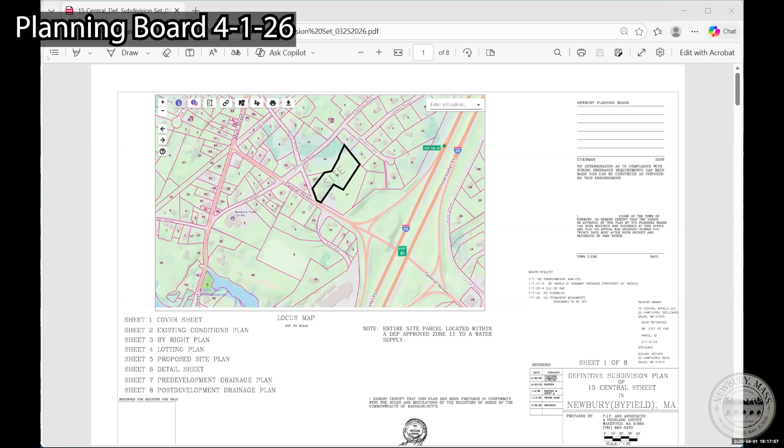Okay, so this is sheet 1 of the subdivision plan, which is basically showing the area around the site. What's in black is the site itself. We did add a notation on here that the property is located in the zone 2 to a water supply. So that's the only change on sheet 1. Sheet 2 is the existing conditions plan. There were no changes to this plan since the original submittal. Sheet 3 is basically showing the by right plan, which is just showing the roadway coming in with a cul-de-sac. Sheet 4 is the proposed subdivision plan. Again, there were no changes to this plan. And sheet 5 is our proposed subdivision site plan. Yep, I can take it from there, Paul, on sheet 5.

Okay. So the big change to sheet 5, our previous design for the roadway, we were utilizing porous pavement. Since the site's within a zone 2 of the water supply, the peer review felt that was not the best choice for stormwater management for this site. In reviewing DEP policy, it can be used, but it's restricted and it was a bit cumbersome. So I redesigned the drainage. I actually think with this design, it's a better design now for stormwater management.

I added a trench drain right at the beginning of our roadway, just off of Church Street. And water will come down that roadway, be connected with a trench drain. It'll convey to a deep sump hooded manhole. And then from there, it will convey out to a rain garden. So it's really a low impact design. The challenge on this site was just getting water from that trench drain to a lower point on the site, but I can do this all by gravity. It's not a pump system. By locating the rain garden where we show on this plan now, it'll all be gravity fed.

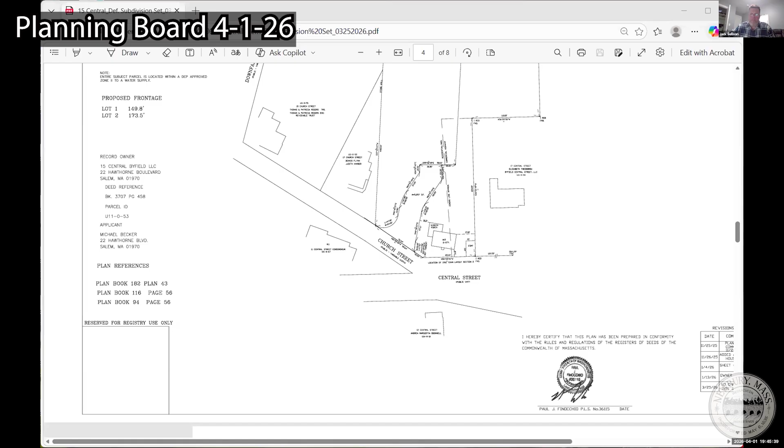I believe he's, do they still have sharing access, Kristen, Sadie? Good, but Jack, if you'd like to share, I can give you that capability. Sadie, if you can enable Paul, he has the plans. Okay, yeah, probably. Thank you. And Mr. Chairman, what was the abutter Mike's address again? 17 Church Street. Yep.

What sheet would we like to see? This is the roadway coming in. So this is number 17, I believe. His house is right here. And the proposed duplex will be back up in this area here. Paul, can you pull the sheet with the topography? Yes. This one here is the existing conditions plan. So there's a large hill here. His house is over in this area right here. And again, the proposed duplex is back in this area right here.

There is a pretty large boulder to the immediate right of his house that would screen the house from the road. Maybe not the duplex, but as you can see, there's pretty significant topography from where we're proposing to put the house down the hill, at what looks like 76 elevation, versus the height of the. If I could just, yeah, I can't really. It's between 76 and 82, 80.

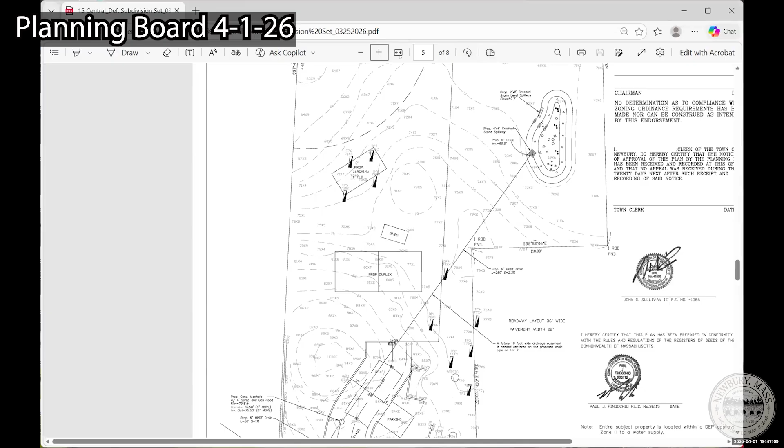Elevation for the proposed duplex, and the ledge is at, it looks like, I don't know, Paul, can you zoom in on that? I'm trying to do that now. Yeah, sorry. The ledge is up around elevation 90. So let's just say an average 90. Yeah, so ballpark 10 feet higher than the ground elevation of the front of the duplex. Correct. And then the ledge outcropping, I've been out there, I'm going to say it's 8 to 10 feet tall on top of that. The big boulder. Yep, I see that. So there'll be some screening provided by that.

We have no intention of removing any trees to the left of that ledge boulder between there and the retaining wall that's shown on the plan. So from the perspective of screening, I don't know exactly where your house is based on this plan, but it seems like there will be a pretty good amount of screening. It's pretty dense foliage that exists now, pine trees and other trees. Paul, do you have the tree plan? Yes, hold on.

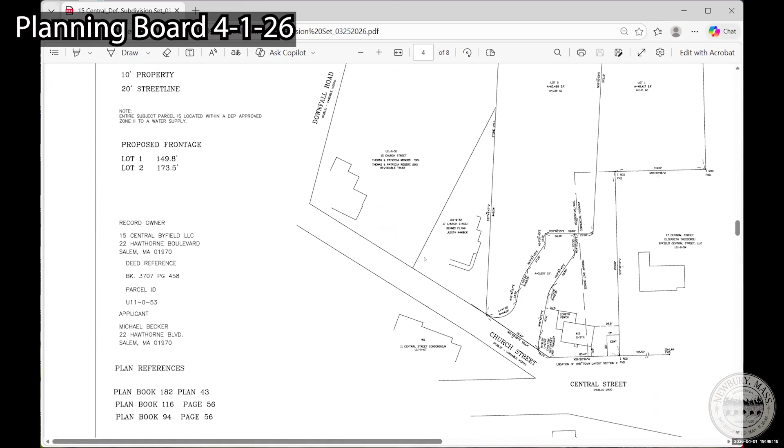So the top of that ledge is basically in line with the back of my house. And from your plans here, where the proposed duplex is going, pretty much when I open up my back door, bam, you'll see this big duplex there. So another question that might help answer would be what exactly is the setback from the property lines to where the start of this duplex is going to be, because I don't know if I missed it in whatever you submitted. We're well outside of the setbacks.

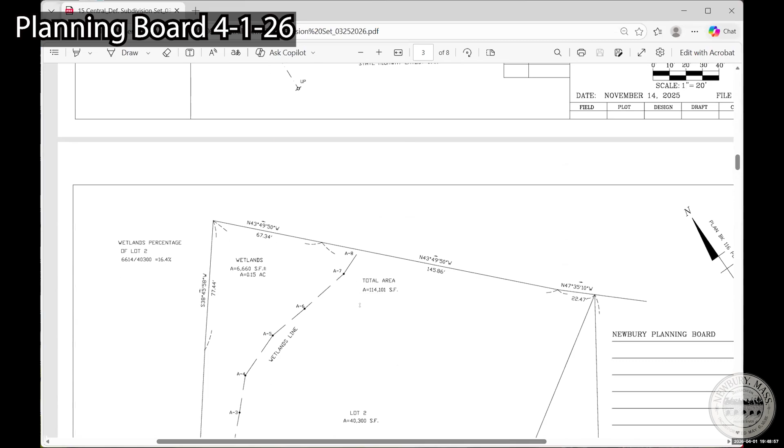Okay. Well, what is. Paul, yeah, this is a good plan to see the trees and the foliage if you want to go over that first, and then we'll go over the distance on the setbacks. As you can see, there's a lot of trees around that ledge outcropping, and anything from the ledge to the left, we won't remove. Some of them sloping down the hill where the house is going to be will get removed, but they look to be redundant relative to what you're looking through. There's more 8, 10 inch, 18, 20 inch trees before you'd even get to the ones that we're going to remove, which would be in front of the shed.

Yeah. I'm not too concerned with the ones that close to the ledge. There's definitely a good amount from the back side of the ledge. My shed's not really on there. Essentially, your shed and my shed are pretty close to each other. So I've just been hoping to work with you on some extra screening between the back side of the ledge and my shed. Like I said, I'm not looking to put up a big wall there or anything. I'm just looking to work with you.

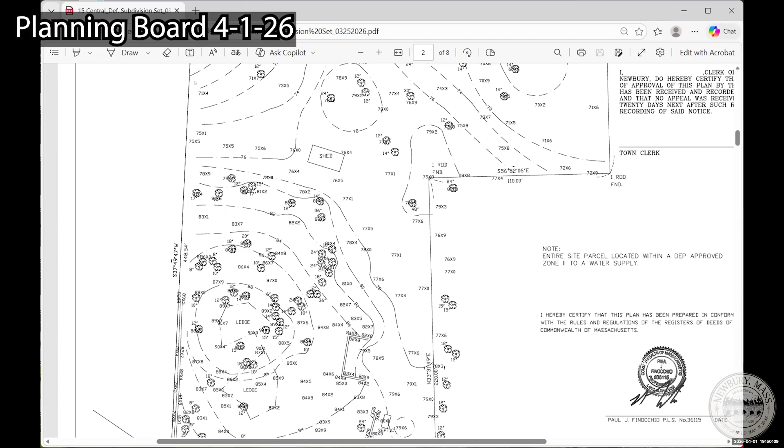Yeah, if you want to pass along your contact info to Sadie or Kristen, I'll happily give you a call. We'll take a walk and discuss what we can add in addition to what trees we can preserve in there. Sure. Yep. That would be great. Paul, do you have the location plan where you can show the setbacks?

Paul, confirm - I have the minimum side yard setback being 25 feet. Yeah, we're greater than 20 feet, well over 25 feet. Do you have a ballpark figure? On the left side it looks to be 40 or 50. On the right side, I think we're around 30. That's ballpark.

Is this the setback for the roadway or for the duplex? I think he's asking how close it's going to be to his lot line - is that the question? Correct. Okay, so for the road it's 36 feet, just looking at the scale. It looks to be more than that, just eyeballing it.

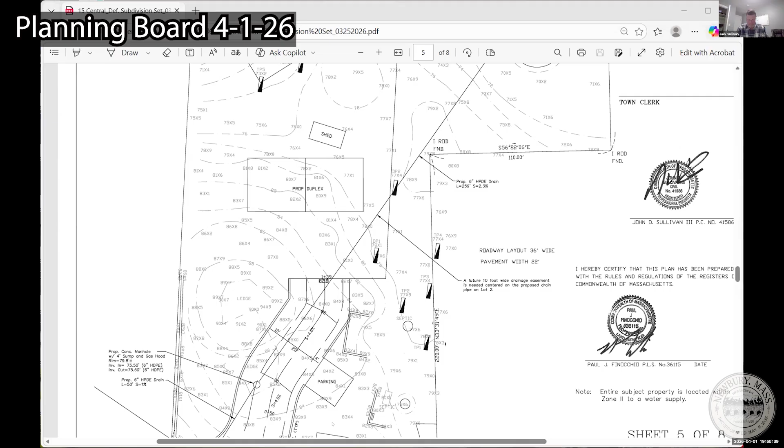Any other raised hands, Kristen? There is Joyce, a couple. Okay, Joyce, your name and address for the record, and your questions and comments please. Can you hear me now? Yes, good. Here, 8 Johnson Lane. We abut the gas station in the back, so we look across to the property.

My question is, one of the plans shows a big turnaround. It looks like - and I couldn't tell from where the duplex was - whether this turnaround you're going to have is going to go around the building. If so, how many trees are going to be removed? I couldn't find one plan that showed both the duplex and this rotary, and maybe you're not having it - that's what my question is.

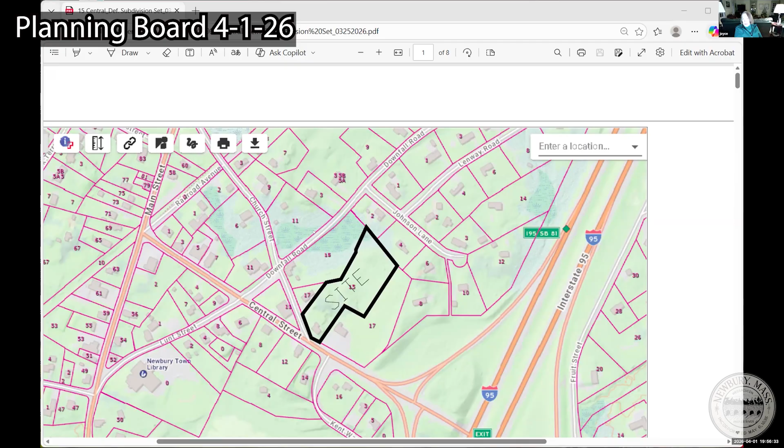Could you speak to that? That's the by-right plan. We have no intention of putting that there, but we're required to show what could be installed by right. So that right there, you're not at the moment planning on having? We're not ever planning on having that. That will not be done. Oh, thank you, because I was afraid of all the trees that might have to come down, and we're so close. Thank you very much.

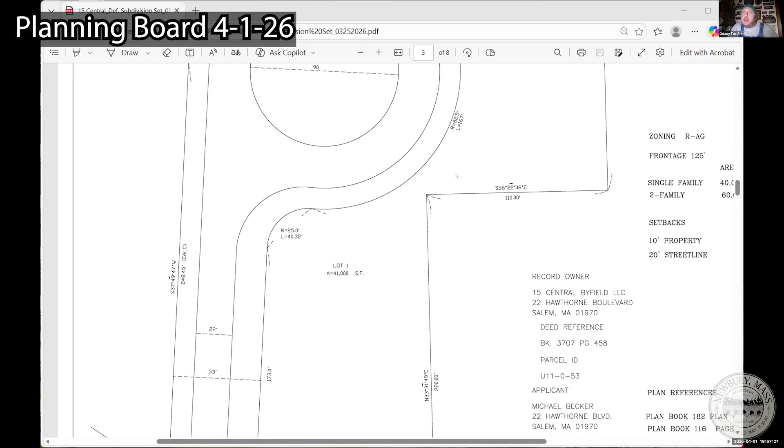Yep, Tom Rogers. All right, Tom, name and address for the record and your questions or comments, please, sir. Yes, it is Tom Rogers and my wife Patricia at 15 Church, 2 doors down. We are abutting the back of the property in question.

First of all, I just got into this Zoom on my phone. I'm down in Texas, I was in a car. I did catch most of what you said, but I just wanted to comment on the driveway.

I appreciate that you've got that drainage system considered there, because that would have been a huge problem for me, because all that water coming down the hill ends up on my property. It's already washing it out, even the way it is. So I appreciate that you've got that little rain garden back there.

But the other point, the safety issue with the driveway, is that we have been trying to close off that intersection with Central Street for years due to safety concerns. The traffic whips around that corner. They actually did make it into a 90-degree turn, but just by people cutting the corner, they've made it into almost a straight run now, and that will probably continue to happen at some point in the future.

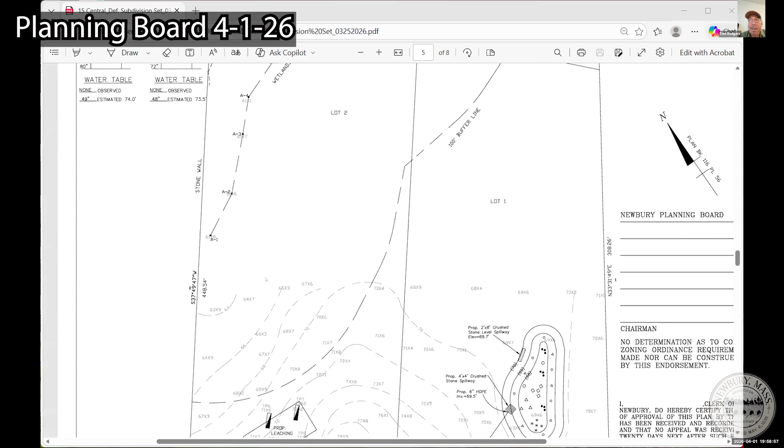I appreciate your concerns about the plowing, but as Mike said, there's plenty of room there to store snow, so that's got to be considered as a viable option. Also, the traffic coming down there is really detrimental to the people living in the church on the other side of Church Street. They have little kids, grandchildren running around there, and it's a really unsafe situation.

If you want to see how many cars come down that road, you can look at my security camera footage, and you can see that there's a large number of cars coming down the street. Maybe 5 to 10% of the cars that come down the street, there's that many going up the street the wrong way on the one-way. And at the stop sign, they blow through it like it's not even there. I've got all that video footage if you'd like to see that.

But as far as closing off Church Street, I think I'd like to be involved in a further conversation there.

Then the second point is getting to Mike's comments on having the new house back there. Where I used to look at woods now, for the last 40 years, I'm going to be staring at a 2-family house, which, hey, you have the right to develop the property, I get that. But the least number of trees that can be cut down and the most trees that can provide cover would be beneficial to everybody there. I think that's the two things I had to say.

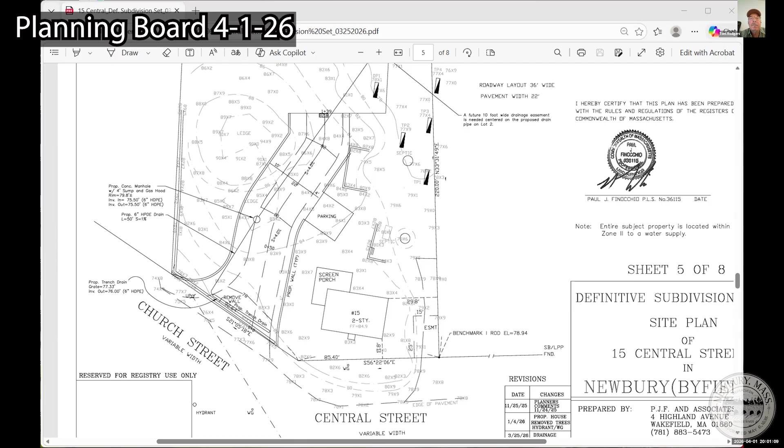And if it's possible, you're at 19 Church Street? 15 Church. 15, you're at Church. 15, I'm right on the corner of Church and Downfall, so the stop sign's right in front of our house. I can show you how people don't stop at the stop sign, and how people go the wrong way up the one-way street all the time.

Cutting a corner, so okay, well, if Mike Becker can reach out to Tom too, and when you reach out to Mike at 17, that would be great as well. You guys can hash it all out together, walk the property line and look at trees, because you both share a property line with this lot.

Yep, thank you for your comments, happy to have the involvement and the discussion. Can pass your info along to the planning department. I'll reach out to you, I'll reach out to Mike, and we can walk the site and discuss what to do for screening. Thank you, that would be very helpful for their concerns. And thank you, Tom, for your comments and questions.

Thank you. Any other public comment? Any other raised hands? I think that's it, unless Mike, did you have another question or?

Yeah, I just want to say again, I think that dead-ending Church Street is a fantastic idea. I know a couple of the members had concerns about the snow, and there's plenty of room at that end when you connect those dots between the corner of the house and the end of the street there. There's a ton of space. Even in a year like this that we have for snow, I definitely think it could accommodate holding all that snow there, and I really, really hope that option is considered.

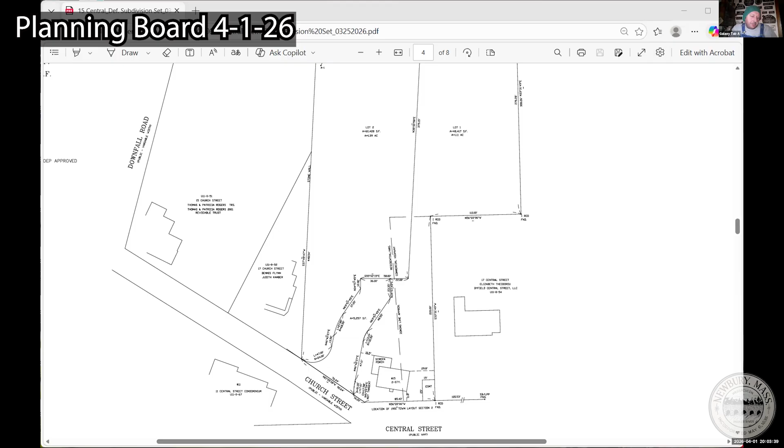Great, so Woody, this is probably more directed towards Kristen and Sadie. So if there were to be any roadway modifications, would that be coming out of the applicant's expense, or would that be a town expense, just for public knowledge?

I think in different parallel projects that I've seen, it's gone forward in different ways. As those of you on the board know, we just permitted a multifamily property on the other end of Central Street, on the other side of 95. There was a similar reconfiguration, similar discussion about the intersection nearby and how making it more teed off would solve some of the safety concerns. That ended up being a condition of that approval, site plan approval, and was a responsibility of the applicant. Obviously the town is involved because the select board has jurisdiction over roads, with input from the Department of Public Works. So it was a process to have those conversations and discussions with the applicant, but it was a condition of the project that the applicant was responsible for.

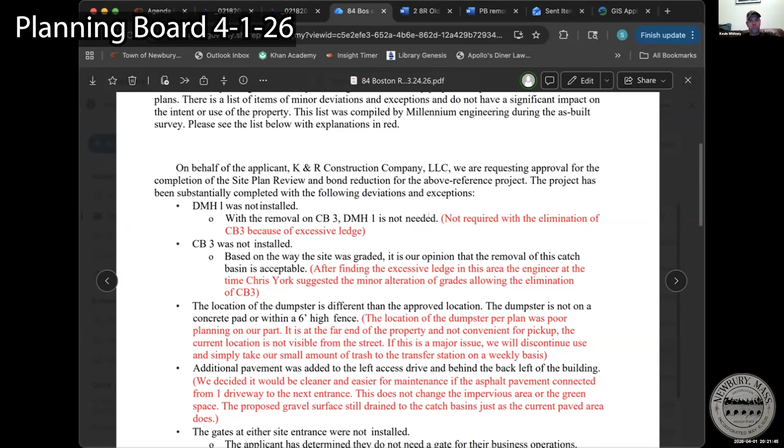So when we started the site work there, our previous engineer of record was Chris York. He left Millennium during the project. But we hit quite a bit of ledge in the rear of the project, so he suggested some slight grading changes, and that allowed us to eliminate CB3. And with the elimination of CB3, DMH1 was no longer required either. TJ took over our project, and he stated in the letter that based on the way the site was graded, it was his opinion that removal of the catch basin was acceptable. Okay. Next.

And it seems like that second one is similar. Mm-hmm. Described. All right.

Next is the location of the dumpster is different than the approved location, and the dumpster is not on a concrete pad or within a 6-foot high fence. And you've written the location of the dumpster per plan was poor planning on our part. It's at the far end of the property and not convenient for pickup. The current location is not visible from the street. And you've said if this is a major issue, we'll discontinue use and simply take our small amount of trash to the transfer station on a weekly basis.

And the next one, additional pavement was added to the left access drive and behind the back left of the building. You've written we've decided it would be cleaner and easier for maintenance if the asphalt pavement connected from one driveway to the next entrance. This does not change the impervious area or the green space. The proposed gravel surface still drained to the catch basins just as the current paved area does.

The gates at either site entrance were not installed. The applicant has determined they do not need a gate for their business operations. We've determined that the gates in the plan were not in a practical location and are not needed.

Bituminous curb was installed instead of sloped granite curb. The bulk of this project was done during the time of materials shortage after COVID. Cost of granite curb tripled. Installing the granite curb would have been an extreme burden. The bituminous curb performs the same function as granite and is in kind to what is used at adjacent properties in the area, such as Newbury Storage and the town transfer station.

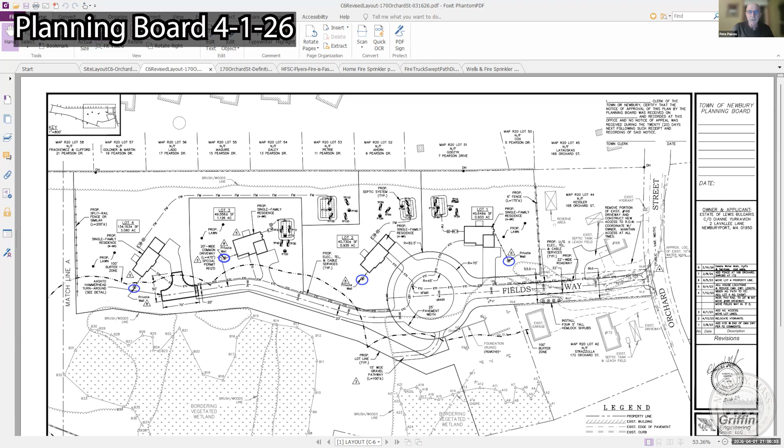Okay, thank you, Bob. I'll start with Pete. Pete, do you have any questions or comments? Sure. Hey, Bob and Mike, it's good to see you, and I'm glad the train's not going by at 7:30. The bad news is you're here later in the day. Okay. Hey, could we drop the screen for a sec? Because I love to talk face to face. Yeah. Just for a sec. So,

You know, I'm a safety guy, and I'm a big believer in safety stuff. I didn't understand the conversation that you had with fire, because all that we have is a very short email. So I'm not sure what their comments were, hydrant versus sprinkler. But I don't know if you're aware, a couple of weeks ago, 13th of March, we had a really devastating fire here in town. And water supply was a big issue. And we actually had 5 fire departments show up here, and we still had a total loss of the property.

Now, we're talking about sprinkling something, and I'm going to give you the worst case scenario. Worst case scenario, there's a power failure and there's a fire. So will all of these homes have backup generators? And if they will have backup generators, because that would be necessary, would those be propane based?

So walk me along the conversation so I can understand why the sprinkler, which is not on a municipal water service, is going to be on a well, which is going to be requiring electricity. Let's just say it goes out and there's a catastrophic event. What's going to be the safety feature in that? Because otherwise the fire department has to go all the way down this road with the truck that has 750 gallons of water, then call for a tanker, and then call for another truck.